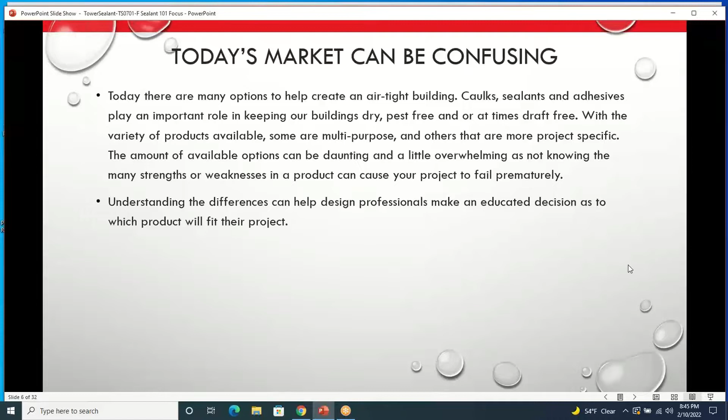One of the things I wanted to chat about real quick was joints and expansion. This is a quick overview of what goes on with a joint, to set the stage for some things we'll get into. There are different effects of expansion and contraction on joint sealants. Some people may think that in the middle picture, where everything is flat, that is what you want when designing the joint. We'll get into specifics a bit later about how this actually works. But there are different things going on with joints - they don't just stretch apart, they also compress together. A perfectly designed joint will look like the picture on the right at application.

You want a concave finish, and you also want two-point adhesion. If you can see my arrows, this round piece in the middle represents backer rod - you really want two-point adhesion to get the best results out of anything you're specifying for joints. For the backer rod, you'd like to use a closed cell - some people don't specify that. There's open cell and closed cell. Closed cell works in that the sealant will not stick to it, versus open cell where the sealant will absorb into it and create more of an issue. With closed cell you get two-point adhesion, which is what you're ideally looking for - if the joint expands further, the product can stretch. However, joints also compress at different times - they're not always moving away from each other.

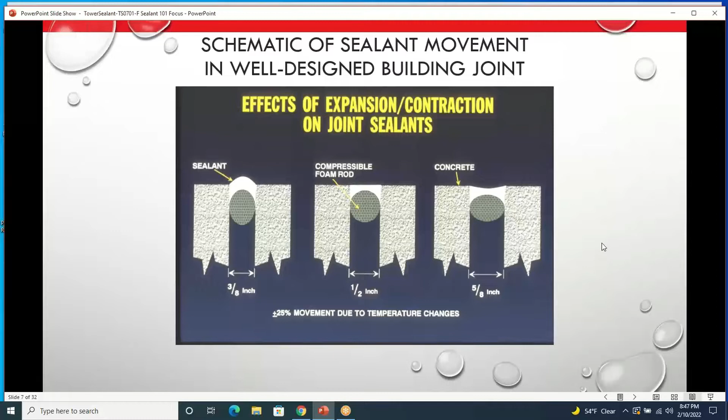There's different stresses on building joints. People don't always think about this, but there are really 3 different stress points for a joint movement. If you have your joint here, you can see my arrow, there are different flex points. They're of course moving into each other, or moving away from each other, which represents the arrow here to the left and the right. They also can move up and down a little bit.

You may have a substrate that is exposed to sun a little sooner than another part of the building. It may expand, which will then put an upward pressure, while another one may be pushing down a little bit. So there's a movement of up and down. There's also a movement of front to back. So while one part of the substrate may heat up sooner than the other or cool down quicker, it can create a flex in 3 different motions when you're looking at a sealant. So it's a very critical part of your building design that you have something capable of handling all of those different movement capabilities.

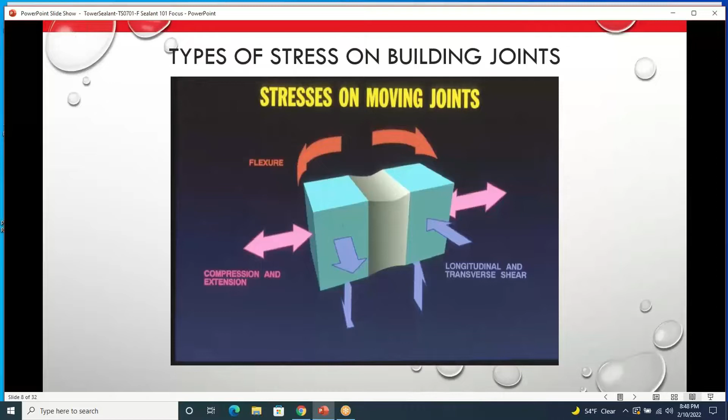So just some quick common reasons why sealants do tend to fail. Obviously, number 1, inadequate surface preparation and/or application. One of the common denominators between any of the sealants we'll cover is you need a good clean substrate. If there's mold, mildew, dirt, anything loose or chalky or gritty there, it needs to be cleaned, it needs to be prepped properly, and then the application that follows needs to be done properly and according to the manufacturer's specifications.

Another reason products fail is low performance sealants in high movement joints. You'd be surprised, like some of the joints we just looked at in the previous slide, where people are using some very inferior sealants that simply cannot handle the movement taking place in that particular joint.

Another issue can be incorrect sealant products in underwater or below grade applications. There are sealants that perform great in submerged surfaces, and others that perform great above, but you would never want to use them on the inside of, say, a fountain or something like that. So there's a difference in where the product is going to be used. Some of the ones that perform great below grade are not so good above grade and do not handle UV from the sun very well.

Another issue that can cause problems is simply sealant and substrate incompatibility. It causes an adverse reaction at the sealant-substrate interface, where the 2 products just don't really seem to like each other, and the particular sealant may not adhere very well. You have to have adhesion to keep a joint working properly and lasting long.

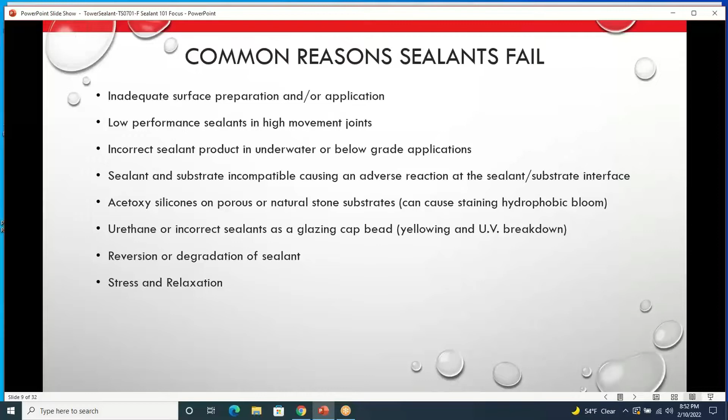The other problem that can cause failure is stress and relaxation. There's a stress if joints are expanding, so you have to have enough elongation to handle that. But there's also a relaxation time. As the substrates cool back down, they may move back together, and some products cannot return to their original size before they started the stretching motion. If they cannot get back down to their original size without some failure, that can also cause problems and water intrusion as you move down the lifetime of the building.

So let's talk a little bit about what the heck are sealants, adhesives, and caulks. A lot of times these terms are used interchangeably to describe products by professionals, consumers, you name it. You'll hear those three terms a lot, and you have to sometimes dig to figure out exactly what this person is asking me about.

Let's make sure we have the right understanding and define the word. They all work as a substance used to block the passage of fluids through the surface or joints or openings in materials. They also serve a common purpose of blocking dust, sound, and heat transmission. You hear sometimes where people are specifying a sealant that meets some sort of acoustical specification. Really, that's just a test that a manufacturer may or may not want to pay for. It's a pretty expensive test, to be honest.

But if you think about it logically, any caulking or sealant that is closing up a gap is going to reduce sound transmission. So that's one of those things some folks look for, but I'll tell you pretty much any caulking, sealant, or adhesive will meet that standard.

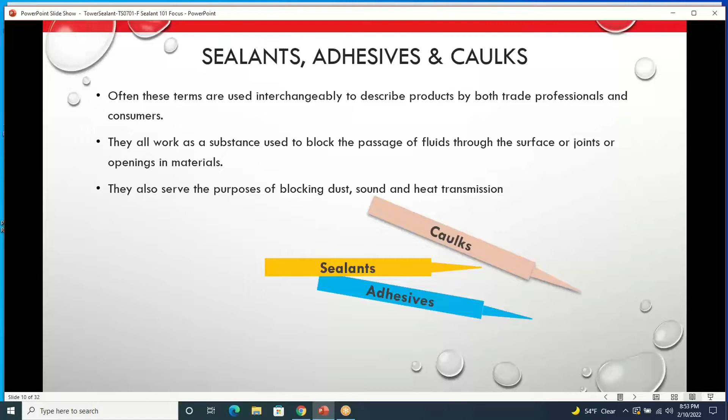So sealants, adhesives, and caulks: performance versus aesthetics. A main difference between them is the elasticity and strength, and that's really the biggest thing you're going to be looking at. A simple way to think of these products is that sealants form a flexible barrier, adhesives bond materials together, and caulks can be used for aesthetics, such as painting, and medium-duty applications where an actual sealant isn't required because the anticipated joint movement isn't that strong.

For the aesthetic grade of caulking, typically an ASTM C834 will meet that grade. That's typically what you'll see used on the interior applications of structures—what you'd use to caulk your baseboard up to your wall before painting, or your door jamb up to your wall. An 834 gives you an aesthetic look, but it's also a sealing-capable product as well.

That's one of the two differences you'll find when you get to the acrylics or acrylic urethanes—the two grades being C834 and ASTM C920. ASTM 920, again, are acrylic technologies that meet higher performance standards. They can typically perform well in place of an ASTM C834 caulk, but they're also expected to show way better movement capabilities, increased elongation performance, better adhesion, and better durability. So they can give you the aesthetics you're looking for, but also a lot better performance.

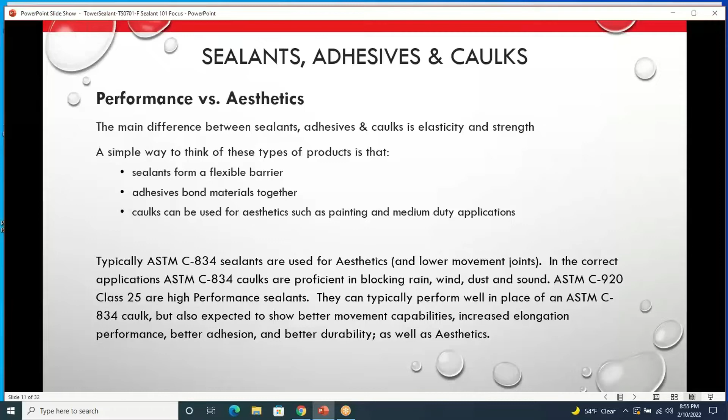Typically, these are the products you'll see used on the exteriors of structures or homes. Certain states actually mandate that even new home construction requires at least an ASTM C920 product on the exteriors.

So what is caulk used for? Caulk is used basically as a sealant, filling cracks and gaps around windows, doors, and plumbing pipes to prevent water, insects, or air from entering your building. Caulks are flexible when dry, but they're not elastomeric and are intended for use in areas with minimal expansion and contraction. That's where the C834 is often referred to as a caulk.

There are a lot of caulkings out there that claim to be painter's caulking or joint fillers, and many of them don't even submit for the C834. If I were specifying a structure in any way, I'd definitely make sure I had at least an ASTM C834 throughout my interiors—you'll get better performance and a better look. They're typically better made, less prone to cracking, and from an aesthetic and performance view, a much nicer product. So try to stay away from any sealants that don't even reach the 834 level, because you really don't know what you're getting with those.

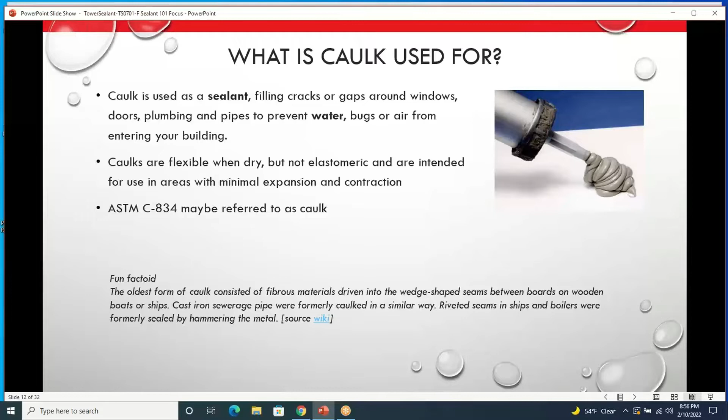So let's talk about adhesives a little bit. I think a good way to look at adhesives is, a little shout out to Peg because she's a PPG person—liquid nails might be a great example we all know as an adhesive. An adhesive can also be known as a glue, cement, or paste. It's applied to one surface or both surfaces of two separate items and binds them together, resisting their separation.

Adjectives may be used in conjunction with adhesive to describe properties based on the substance's physical or chemical form, the type of materials joined, or condition under which it is applied. Typically, you'll see adhesives used in carpet adhesive, ceramic tile, concrete, countertop lamination, flooring underlayment, drywall lamination, and some other areas.

People can use caulking and sealant as adhesives, and some do, but they're not specifically made for that. The adhesive application typically involves a little more glue, and they tend to be a little more chemically cured or moisture cured. They'll probably dry quicker than an acrylic would for adhesive type use. So they do have their place, and you'll see them used for that.

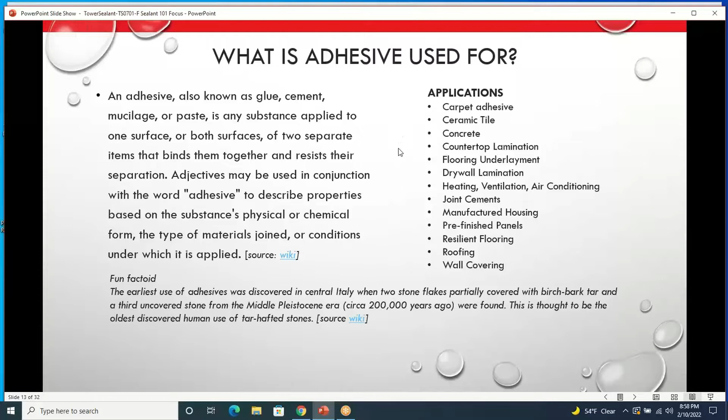So sealants, what are they used for? A sealant is a material that can be applied to a gap, joint, crack, or opening in a paste or liquid form that cures or hardens, forming a seal, a barrier against gas and liquid entry. They are made from flexible material, making them ideal for areas prone to expansion and contraction.

ASTM C920 compliant products are typically called sealants. You have a lot of solvent-based products that meet the ASTM C920. And if you're working with acrylic products, definitely make sure you find one that's rated with the ASTM C920 as well. That will give you the expansion and joint movement that you're looking for on the exterior of structures.

A typical minimum flexibility for an ASTM C920 is going to be at least 300% elongation. Your best ASTM 834s are going to give you maybe 250% elongation, and those are the best. Typically they're going to run around 175 to 200.

If I were specifying the exterior of a structure at all, including a home, I would make sure that whatever I specify is a C920. Again, a lot of those will be a minimum of 300%, and you can get up to 800% elongation with that formulation in those products.

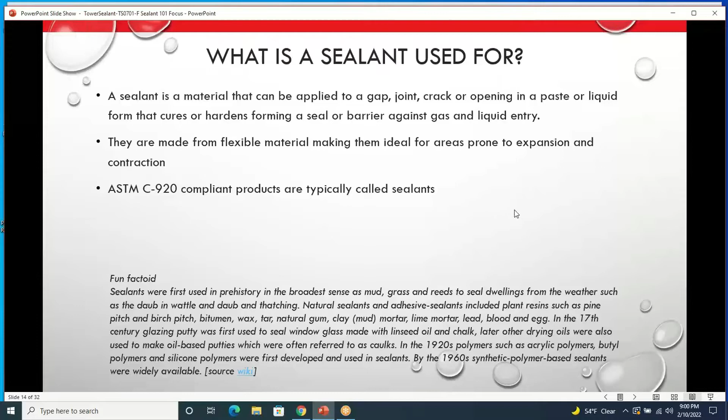So sealants, basically in short, are higher performing with bigger joint movement, and that's what you're going to want for your exteriors typically.

Here's an overview now that we've talked about some of the terminology of the different chemistries that are out there. We'll dive into a little bit on all of these. You basically have 5 different categories today that you can choose from that will meet your different needs in establishing waterproofing for your buildings or specifying what you would like for your sealants.

There are latex acrylic products, polyurethanes, silicones, hybrids, solvent-borne hybrids, and acrylic urethane hybrids. So these are generally your 5 different chemistries and what you're going to look for as you move through it.

The latex acrylic to your far left, I would consider this your acrylic 834s. There are 2 different chemistries for how things cure in sealants. With your waterbornes, whether they're acrylic urethane or latex acrylic, they're an evaporative cure. What that means is the product dries as you would expect, like wet paint for example. You put a coat of paint on, the product dries, and then you're left with the product. It is an air-based, air-drying chemistry.

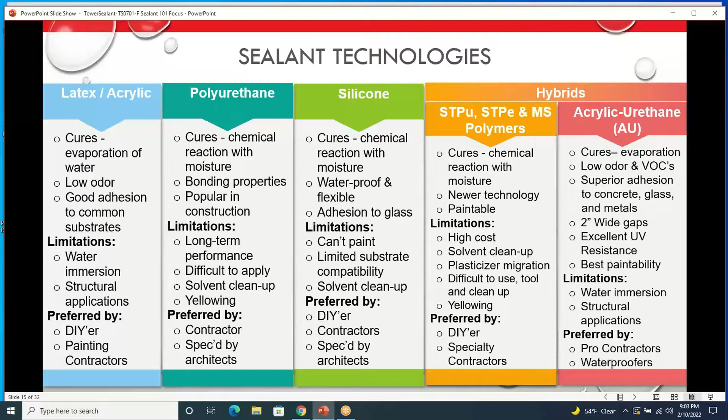So we'll dive into these a little bit deeper, but that's a quick overview of really the 5 different technologies that are out there. So let's talk about the waterbornes and the basic caulkings.

The strengths cured by evaporation of the water. This is the products that will typically be 834. They're residential, commercial construction, weather sealing, painting, and more. They're easy to use and clean.

You can clean up with water. You do not need solvents for cleaning. A lot of the other technologies that are out there, you have to use xylene or mineral spirits or alcohol to clean those. The other good advantage of this product, those basic waterborne products, odorless, very low odor, so it's not offensive to others. And it typically gives pretty darn good adhesion to most construction substrates.

Limitations though, not for water immersion. If they are constantly submerged, the waterborne basic caulkings and whatnot are not going to perform under constant submersion. The water eventually will break them down in time. Now, when I say that, if they're wet a few days and they have a time to dry out, if you have an incredible rain season or whatnot, that's okay. It's basically where you cannot have them being underwater for 30 days straight.

They're also limited in that they're not necessarily a construction sealant, so you're not really going to use these for high-rise structural applications on the exteriors, and they're not typically used for high heat applications. So there's some of your limitations on that.

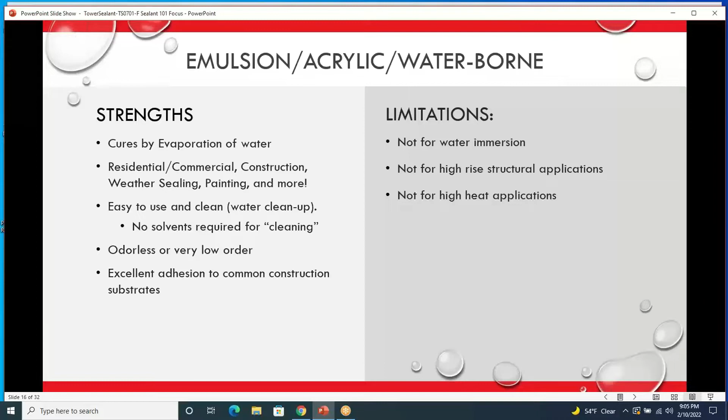Silicones. So been around forever, great product. There's some different silicones that are out there as well. You have 3 types of cure: neutral, acid, and chemical cure. Neutral and acetoxy cure by a chemical reaction with moisture, just kind of like all the others do. They react with moisture to get their full cure.

A chemical cure sometimes does require an activator or a catalyst. You'll see there are some 2-part products that will need to be activated in the field during application.

Silicone, actually regular, normal kind of silicone that you're used to seeing is getting sort of hard to get. There's a bit of a shortage out there right now, and they're moving to higher end silicones that are used in the electronics, avionics industry, structural glazing, different things like that. Silicones are definitely getting a little tougher to get, and when you do get them, they're getting to be very expensive right now.

But they definitely are being moved into the higher end areas. Great strength of silicone: they're very water resistant, very durable, and it stays flexible. Heat resistance for silicones, fantastic. If you have an area where you think this is going to be a very high heat area, they're fantastic for that too. And their adhesion to glass is phenomenal.

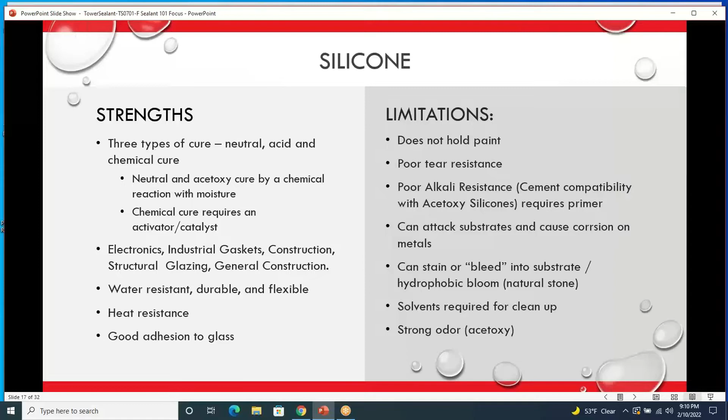So let's get into polyurethanes a little bit. Again, this is a chemical cured product that uses moisture in the air to cure. The strengths of it: it cures pretty fast, actually, which is one of the great things with the moisture cure. You need to give it some time before trying to paint over it or anything like that, but it does cure, and it will probably be the best it will ever be within, say, 5 or 6 days of its application. That's going to be the best a polyurethane is ever going to be for that particular structure.

It's used in automotive, industrial. You'll see it a lot in parking areas, sidewalks, gutters, construction adhesives, and tilt-up. It has really good tear resistance compared to, say, silicone. It has great initial adhesion, and the big strength it has too is that it is good for continuous water immersion.

So if you're using below grade, I would definitely recommend staying with polyurethanes inside a fountain or something like that. Look at polyurethanes. Limitations on it, though: it does have a very short shelf life. The product needs to be used within a certain time frame, or it just won't be there to use. If it's a two-part poly where you have to mix it, you have typically a very short pot life on putting the application in place as well.

The biggest urethane limitation, in my mind, is when you have unpainted joints and the UV. Polyurethane struggles with UV, it will break it down. I'll show some pictures a little bit later in here, but I would just challenge you to go by a shopping center or a tilt-up facility or anything like that, and you might see surface crazing and cracking on the joints in between the concrete panels. That is the UV absolutely breaking polyurethane down. It does not hold up well to that.

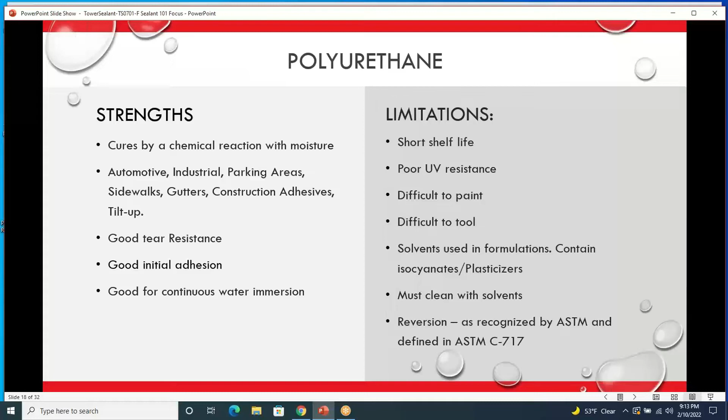It has its place, but it has its struggles, just like everything. I wish there was one magic bullet for everything, but we all know the world doesn't work that way. So let's get into the hybrids and polymers.

Strengths: it cures pretty darn quick with a chemical reaction with the moisture. It has a really fast strength buildup, good initial tack. The adhesion is pretty strong with the hybrids and the MS polymers on the front end.

Great water resistance, and what's great about it too is, like the polys, it can be used below grade. If you don't have UV interacting with it, it really holds up and performs great. You could use this inside a fountain or an area that's continuously wet or moist, and you're not going to have any problems with it at all.

It's used for construction, windows, doors, kitchen, bath, roofing. Some of the hybrids and polymers, you'll see some of the roofing guys use those for some of their flashing systems and things like that.

You can use it inside or out. It is water resistant, durable, and flexible, with good adhesion to glass. It is paintable, but it can cause shiners, and we'll get into that a little bit too.

One nice thing about this compared to most of the polys, it doesn't have the isocyanates, which are some things you want to try to stay away from if possible. Some formulations are even phthalate free, and it has relatively low odor, which is pretty nice.

Limitations: as with the polys, you have a short shelf life, and the UV resistance is really just not there for long term. Again, it's hard to work with and very difficult to paint. Some are paintable, but some do require a special primer or a solvent wipe before painting, and you've got to clean up all the tools and application process with solvents.

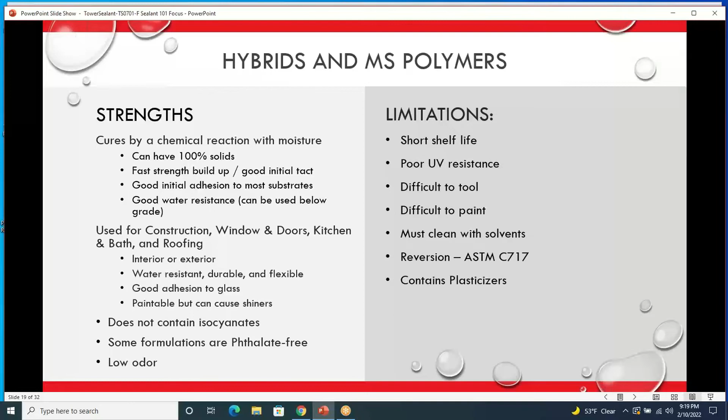Acrylic urethanes are like the higher end version of the acrylic caulking we talked about, assuming we're at ASTM 920. They also cure by evaporation of water, so a little slower cure on the front end but more paintable, faster. They have excellent adhesion to common construction substrates. Used in residential, commercial, weather sealing, waterproofing, tilt-ups, you name it. You can use these inside — probably a little overkill for interior uses, but it can be used.

Superior paintability — acrylic urethanes are compatible with acrylic coating systems. Everybody remembers oil-based alkyd paints; those worked great over solvent-borne sealants. But we're using acrylic coatings today — that's what's out in the real world, what's being used, and what performs best. Having sealant systems compatible with acrylic coating systems is definitely a win and helps eliminate some problems. Also easy to apply and tool.

Clean up simply with water, low VOC, low odor, and odorless during cure time. Big limitation: acrylic urethanes cannot be used for water immersion or below-grade applications. They're also not recommended for structural skyscraper-type applications like some silicones are — not a structural sealant for glass windows on high-rise buildings, things like that.

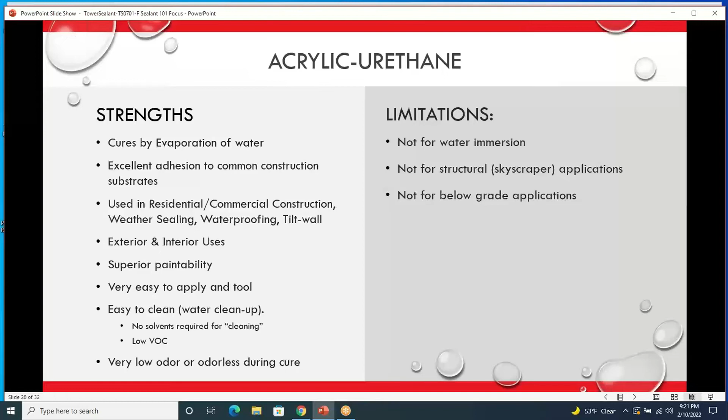Talking about acrylic performance — I may have covered some of this — there are acrylics that are basic caulkings, 834, and then elastomeric 920s and acrylic urethane 920s. The acrylic urethane technologies are different from poly, silicone, and hybrids. They're waterborne and cure through evaporation, while silicones, polys, and hybrids cure by reacting with atmospheric moisture.

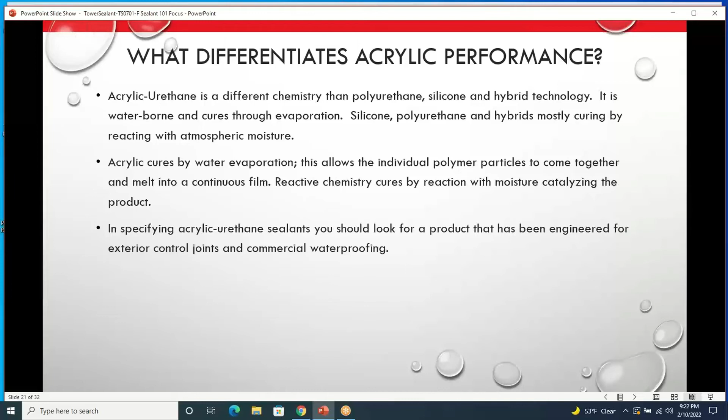The acrylic cures by water evaporation, which allows individual polymer particles to come together and melt into a continuous film. The reactive chemistries of the others cure by reaction with moisture, which catalyzes the product to perform. Those are some of the chemistry differences between the technologies. It's super important, if you're specifying acrylic products, to look for a product engineered for exterior control joints and commercial waterproofing for exteriors — you're pretty safe going with the 834s on the inside of your structures.

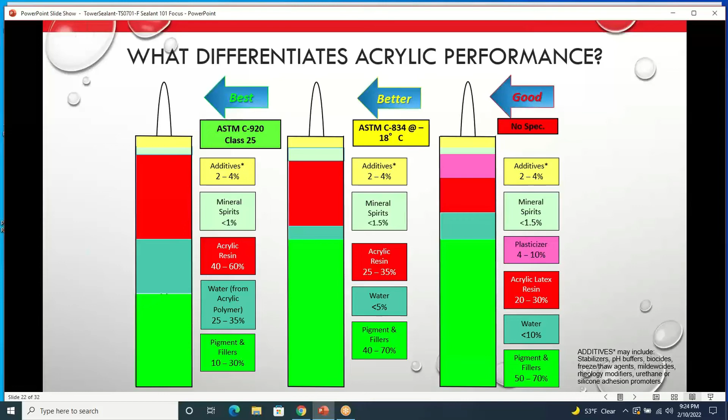So that's just a quick techie sheet there if you want to take a look at that sometime.

So let's talk a little bit about the different chemistries and different decisions that can be made in your specifying. Let's talk about preventing water intrusion in buildings. We kind of chatted on this as we were warming up here a little bit about water leakage.

It is a major issue with problems. You can cause physical damage to the building. You can have adverse health effects, compromised indoor air quality with interior mold and mildew issues, health concerns from mold growth, especially in medical facilities and nursing homes and things like that. There's fire hazard that can result from water damage, slip and fall hazards. Your energy bills are going to be higher, and the structural integrity of your building will be compromised, not counting the stains.

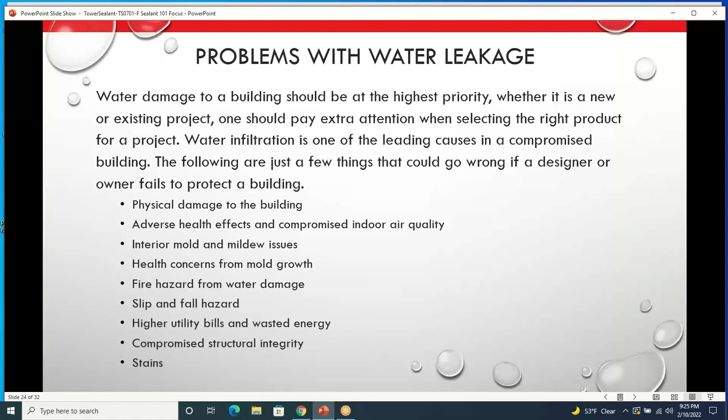And from an aesthetic point of view - we talked a little bit about this earlier, I kind of stole thunder from this - but this sheet here will show you a little bit of what we were talking about with the joints.

To the left, this is a 2-inch properly designed joint. I think this will give you an image of what the drawing to the right shows. This is a couple pieces of masonry that we have here, and this is the closed cell backer rod in the middle that we discussed, that allows you to get the 2-point adhesion. So the substrates have 2 points of adhesion here. If the sealant were to go all the way down to where the joint ended, that gives you 3-point adhesion, which puts additional stress that contributes to a proper joint failing sooner.

So not only does your applicator save a boatload of money by filling gaps like this with backer rod that comes in various sizes, it actually gives you a better joint by having strictly 2-point adhesion and not 3. So this is what you would want when you're specifying a building, and what we typically see in drawings and plans. The drawing here to the right is just an example of it.

Again, a properly designed joint - the joint should not typically exceed more than 2 inches. If we get more than 2 inches, we've got some kind of issues. Even in tilt-ups, you don't see that all that often.

And the ratio too, just in case everybody's wondering - a joint fill should be no deeper than half of how far it is across. So for easy math, if we were doing a 2-inch joint like we're doing here, the sealant should not be any further down than 1 inch deep. And that's probably even overkill, but on the sides here, that's about where you're probably going to want to be.

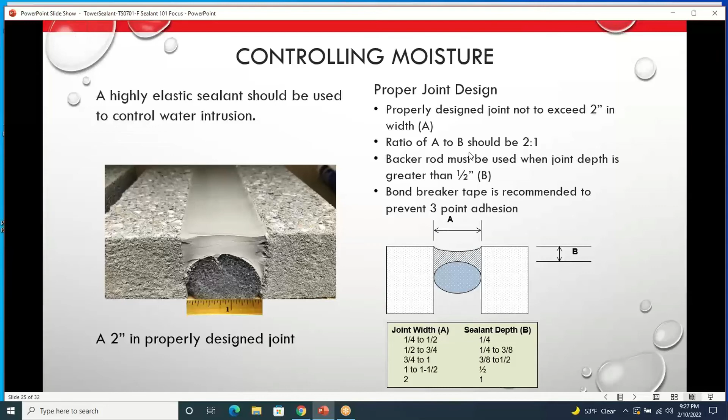So choose the right sealants for moisture control. You want something highly elastic that bonds at the molecular level. You want something, honestly, that can get to the 2-inch gap, because you never know what may happen out there.

You want something with a great mold and mildew additive package, something that's good in all weather conditions, can be applied in most. You also want something that will be long-term, maintain its high elasticity and adhesion even after years of exposure. I'd also look for superior adhesion to construction materials over long periods of time.

Some of the ASTM tests that are out there really only test against 3 different substrates - typically glass, metal, and masonry. There's a million other things you guys are specifying on your buildings out there, from Hardie board siding to a million different things - wood and whatnot, different vinyls, different things like that. So do a little research, make sure you're comfortable that the adhesion to multiple construction materials is there for you.

You also want something that's not going to lose its bond or elasticity under varying mechanical stress - non-aging, non-sagging. When we talk about sagging, a lot of times people refer to that as hang time - how thick can you put the sealant on before it will begin to droop or drip or run? Same thing with coating - like if you're applying elastomeric paint, you might be able to apply it at 30 mils and it dries 15 mils dry.

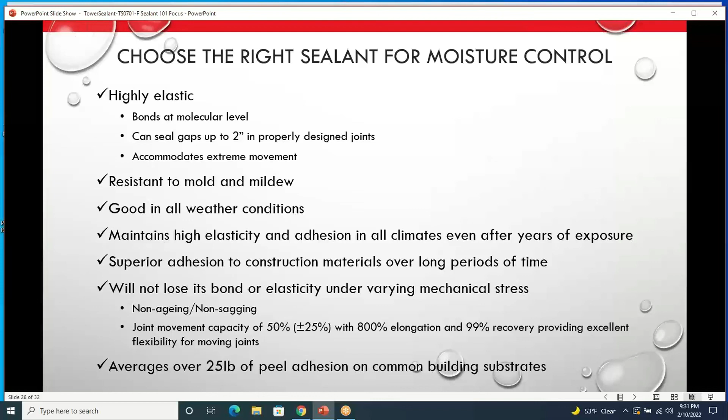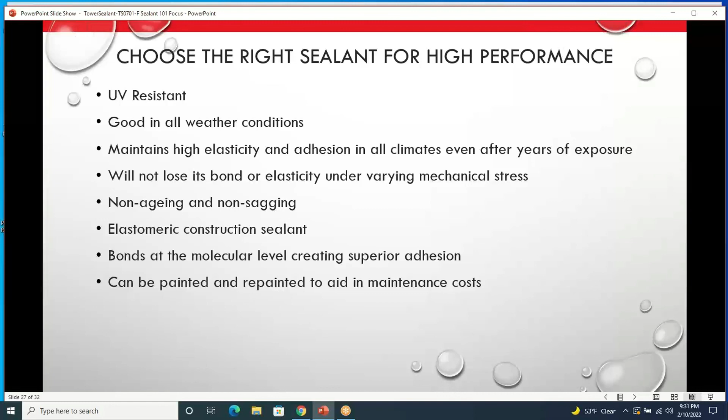You also want something that's going to be UV resistant, especially if it's not being painted - very critical - and good in all weather conditions. I think this might be almost a duplicate slide, so I'm going to move on.

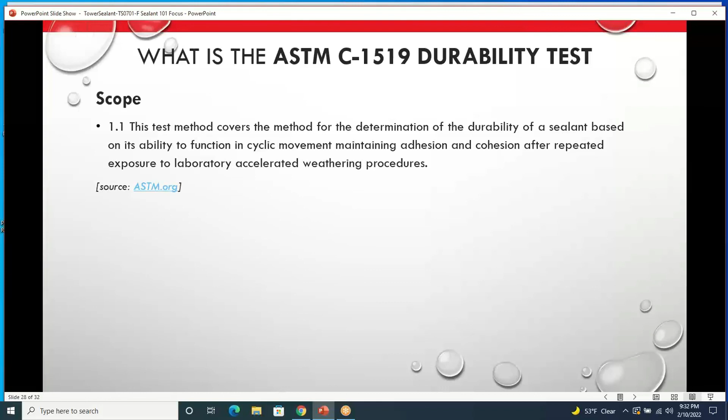There's a durability test, I'll just go over this briefly. It's a higher end test that you don't see advertised or talked about too much, called a C1519 durability test. What it does is expedite conditions to show how things perform over time. I thought it's interesting to see how the polyurethanes do versus some of the others.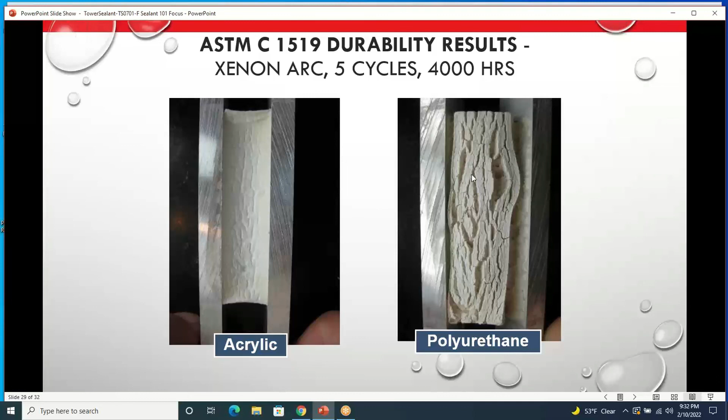It also gives us some examples of things we're talking about. This is a massive surface crazing over 4,000 hours of a xenon arc UV test - this is what can happen to some of their chemical technologies. The acrylics and all that, yeah, they take a little bit of beating. They don't look as bad, but after the same amount of time, they're still working. A lot of these products will revert and go back and just lose their performance capabilities.

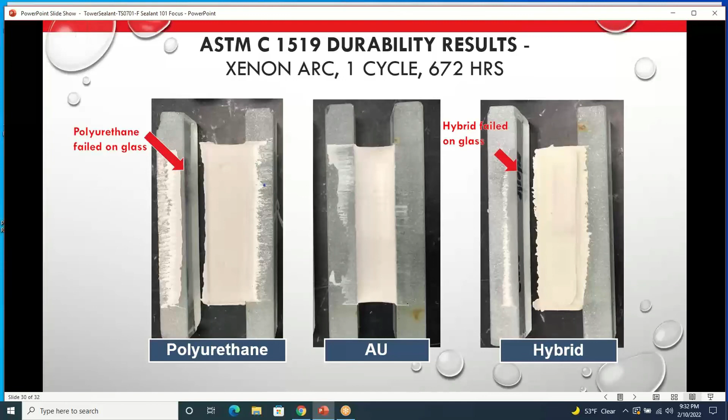Same thing here - we've got hybrids on glass and polyurethanes versus acrylics, so you get a little bit of that as well. Again, the aggressive testing and long-term performance can sometimes make a difference.

Just to show what we were talking about with the crazing cracking - if you guys go by a strip center or shopping mall and look for some tilt-up joints, you'll see this. This is where UV is beginning to break down some of the solvent-borne chemistries that are out there. So just something for you to keep an eye out for, to better show what I was referring to from our earlier discussion.

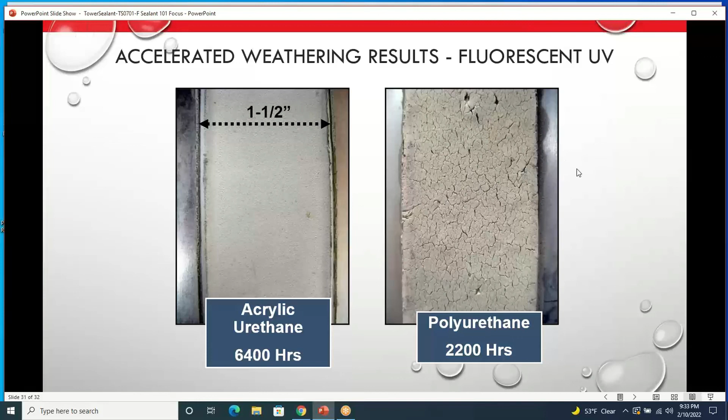Basically, that's about it. So that's kind of a general overview. I'd be more than happy to take any questions or comments or anything else.